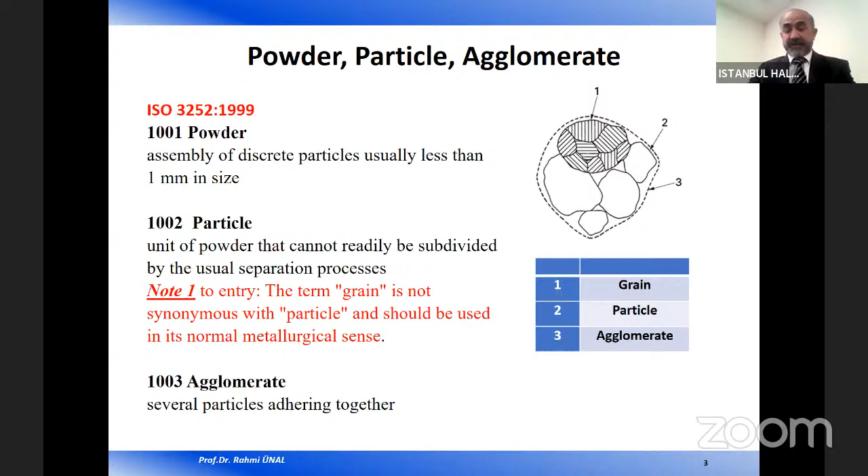Metal powders for additive manufacturing are the raw material. As you know, we use powders to make parts using different additive manufacturing processes. For that reason, metal powders are a very important element of the metal additive manufacturing process.

The critical factors influencing powder attributes must be managed carefully through its entire life cycle to produce quality parts at a competitive cost. The life cycle of metal powder includes powder production, shipment, and various additive part manufacturing steps.

In this presentation, I will focus on powder production methods. Powder quality and consistency need to be maintained at each step of the process, including powder storage and handling. The important elements of metal powder include development of physio-chemical properties, wide supply base, and competitive cost.

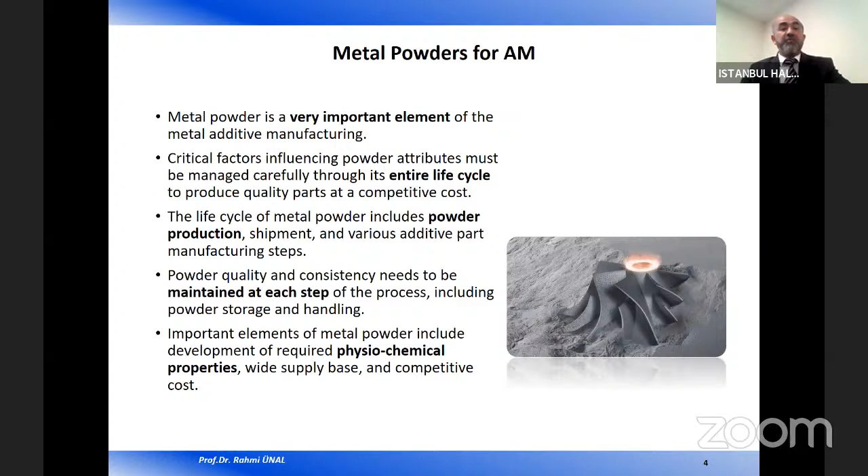Now, let's look at the critical factors of additive manufacturing metal powders: spherical powders with a low level of satellites. If a small particle is attached to a big particle, it is called a satellite.

This reduces the flowability of the powder. Due to this effect, spherical powders have to be without any satellites, or at a low level of satellites.

A high purity and reproducibility level is also important. Oxygen level is another critical factor. And there can be porosity in the powders - this is also a factor.

Good flowability is very important, especially for laser powder bed or electron beam melting processes. High apparent and tap density - these are density definitions.

There are many standards about powder properties. Some of them are listed here. For example, apparent density measurement has an ISO standard, 3923-1. And tap density measurement - I don't want to give the detail of the measurement techniques, but there are many standards describing the measurement techniques, and they are used very much in this industry.

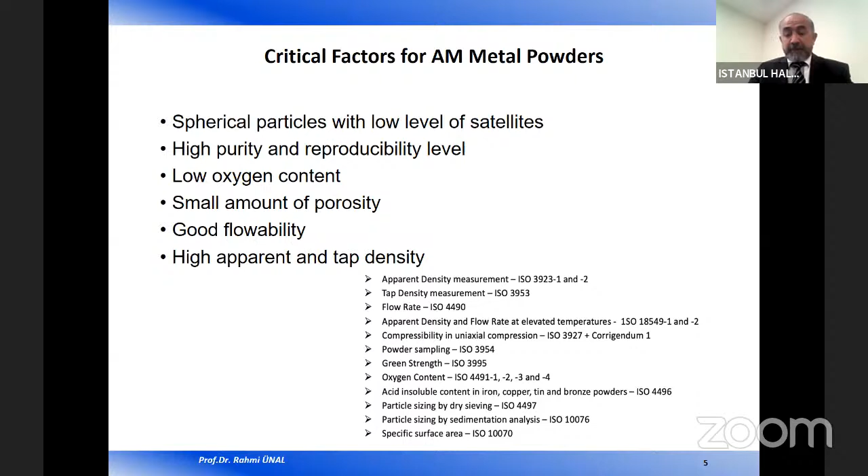If we look at the powder production methods, we can classify them as atomization processes, melt spinning, rotating electrode process, mechanical process, chemical processes, and also electrolytic processes, which is not listed here. Powder production method controls the particle size, particle shape, and other attributes including purity, microstructure, and cost.

For the production of metallic materials, atomization of molten metals and alloys is one of the common mechanisms for production of spherical powder.

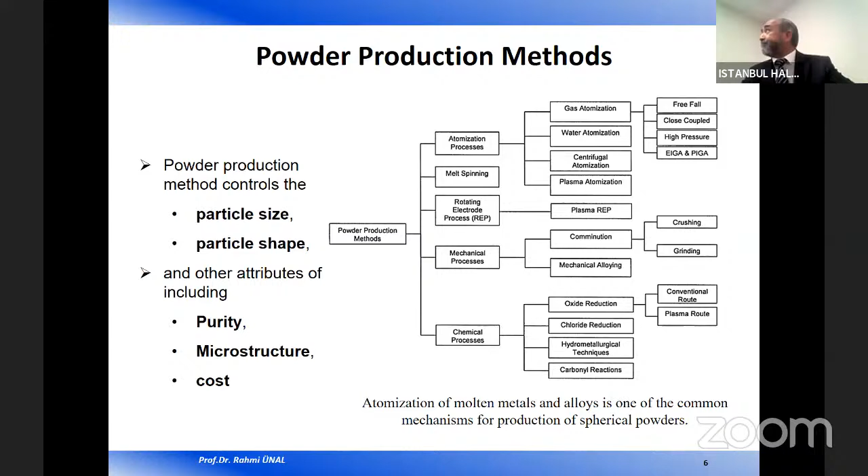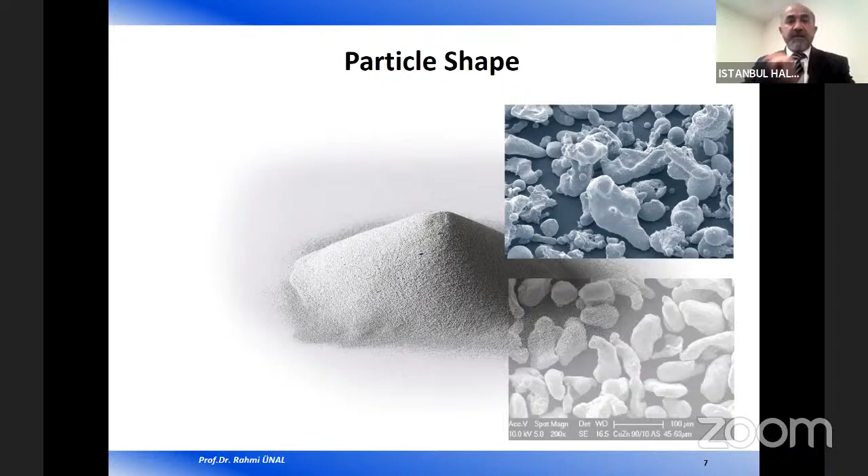Let's look at the particle shapes. If you look at a bulk powder, you can see such a figure. If you look at a closer scale, the particles are irregular in shape. It can be rounded shape, it can be acicular shape, produced by mechanical process. It can be flake type,

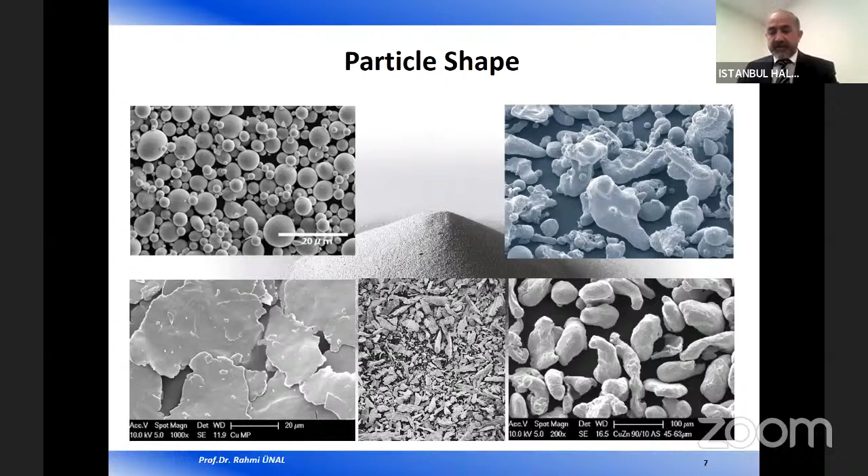and it can be spherical. Spherical powders are used for additive manufacturing processes due to the high flowability and high densities. The production method defines the final particle shape, but there can be some operations where irregular particles can be shaped into spherical by additional processes.

We melt the material in a crucible and pour the melt through a hole, and the nozzle applies high pressure that disintegrates the molten material into small particles. It is solidified in a closed chamber, so the powder is obtained in the closed chamber, and we can control the atmosphere. For that reason, we can produce clean powders.

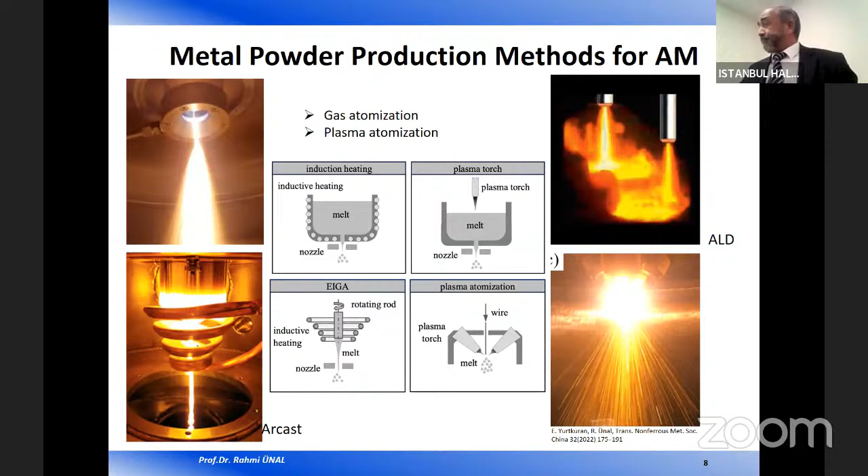This right bottom figure is from our study. I have conducted a project from TUBITAK. It was about plasma atomization. We have designed and constructed a plasma torch, and we have tried titanium alloy powder production.

As I said, there are mainly two basic processes: the first one is gas atomization, and the second one is plasma atomization. Let's look a little bit in detail at the gas atomization process. It can be divided into two groups: free-fall nozzle and close-coupled nozzle. The most used systems are close-coupled nozzles because we can produce fine powders by using them.

Free-fall nozzle can also be used, but the final particle sizes are bigger than with close-coupled nozzles.

We can use air, nitrogen, argon, and helium gases for the gas atomization process, depending on the material. All gases can be used, but if you want to produce clean powder, we have to use argon or helium, because air can cause oxidation of the materials, and nitrogen is not an inert gas. Argon and helium are inert gases, so for clean powder, we have to use argon or helium.

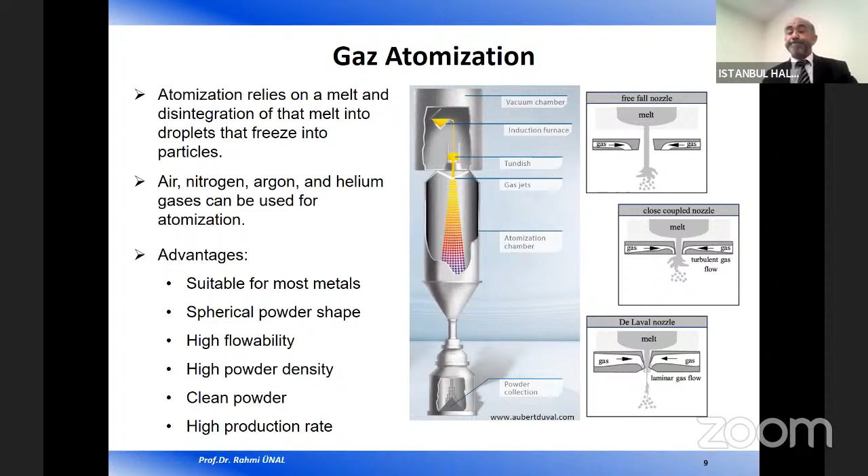Maybe the most important issue for cost is the high production rate. Due to high production rate, the final cost is less than other methods.

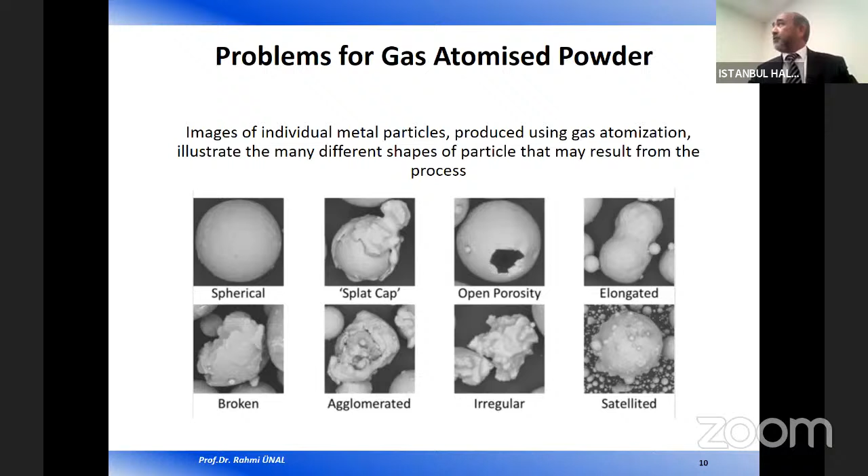There can also be some problems during the gas atomization process. We can produce spherical powders, but we produce the powder in a closed chamber, and in the closed chamber there are powder clouds. Due to the powder clouds, there can be splat cap, open porosity, elongated shapes, broken, agglomerated, irregular, or satellite formations, as shown on the right bottom. If you control the process parameters correctly, you can reduce these problems.

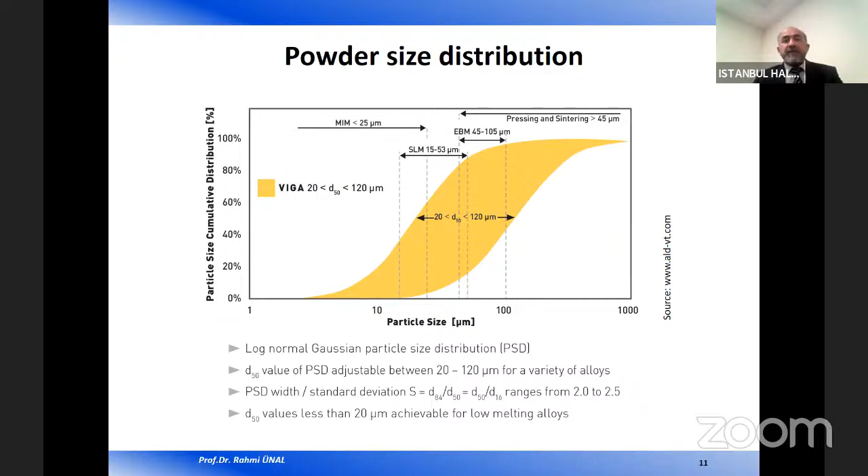We have a size distribution, and we use some portion of it for laser bed production processes. It is generally less than 53 micrometers, with a range of 15 to 53 micrometers. If you look at the distribution data for the laser bed production process, the powder size should fall between these values.

If the median powder size is 20 microns, the yield can be about 50%. If the median powder size is 60 micrometers, the yield can be 40%. The remaining powders can be used in other processes, as listed in the figure above.

For example, powders up to 106 micrometers can be used for the EBM process. Coarser powders can be used for other powder metallurgy processes like press and sinter technology and other techniques. Smaller powder, less than 15 micrometers, can also be used for metal injection molding. So if you produce a powder, it has a size distribution, and after classification, you can use each part for different applications.

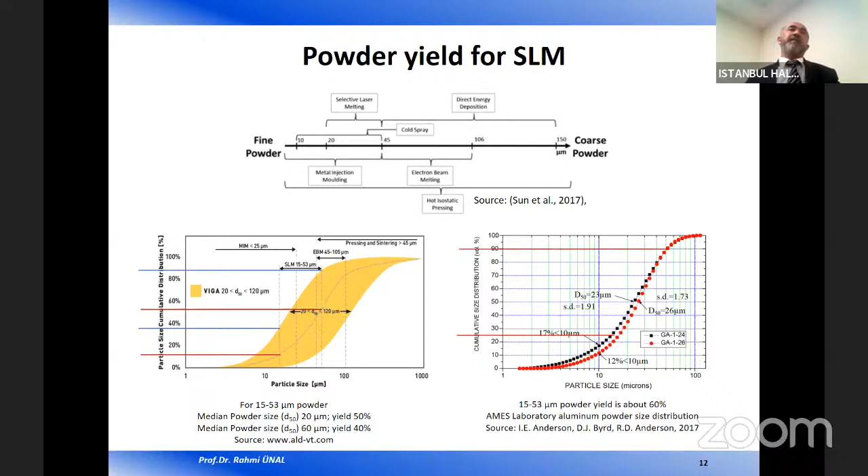The left figure is from ALD, and the right figure is from AMES Laboratory in the USA, showing aluminum powder size distribution. It has a similar size distribution for 15 to 53 micrometer powder, with a yield of about 60%. So we can say the yield for this powder size range can be from 40 to 60%, which increases the costs.

Now let's look at the titanium alloy powder production processes. We have already talked about EIGA, electrode induction melting gas atomization, and plasma wire atomization process, sometimes called plasma wire or plasma atomization. Plasma rotating electrode process is another process, and cold wall induction crucible atomization is another process.

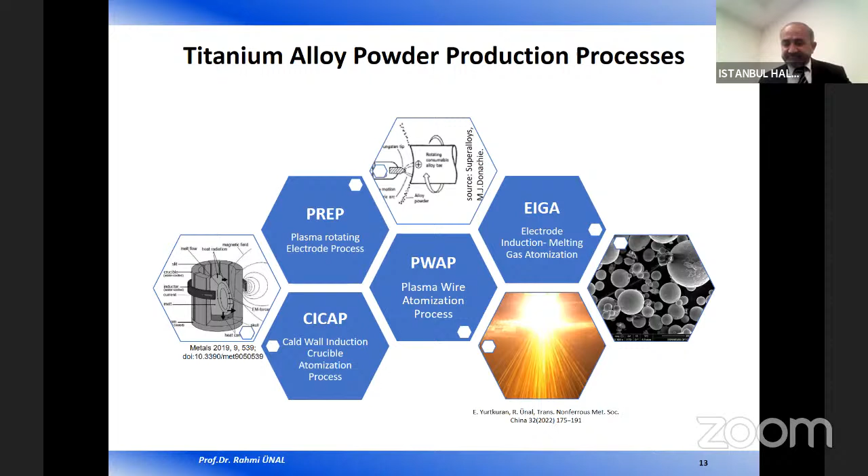There is a crucible in the cold wall induction process, but there is no contact between the melt and the crucible. However, the energy used is very high, and for that reason, it is not competitive with other methods.

Let's look at the oxygen level for some size ranges. If the powder is less than 15 micrometers in size, it has 3500 ppm oxygen. Less than 45 micrometers, it is 800 ppm, and if powder size is greater than this value, it can have 600 ppm oxygen level. We can easily say that small particles are more sensitive to oxidation.

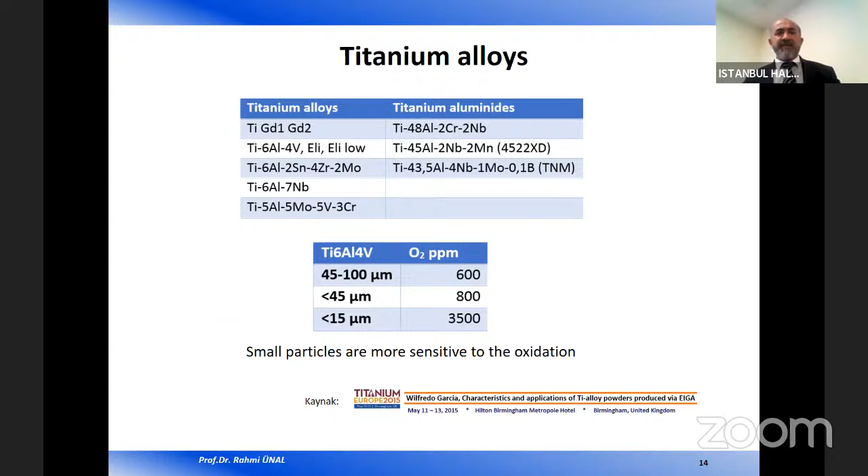Looking at the EIGA process for titanium alloy powder production, it was the first method used. Plasma atomization is now mostly used for titanium alloy powder production. In this process, the production rate is very low, and it depends on the electrode diameter.

Up to 90 or 100 millimeters electrode diameter, the production rate is about 1 kilogram per minute. If you increase the electrode diameter to 140 millimeters, the melt rate can increase to 1.5 kilogram per minute. The production rate is not so high, it is very small, and for that reason the cost is high.

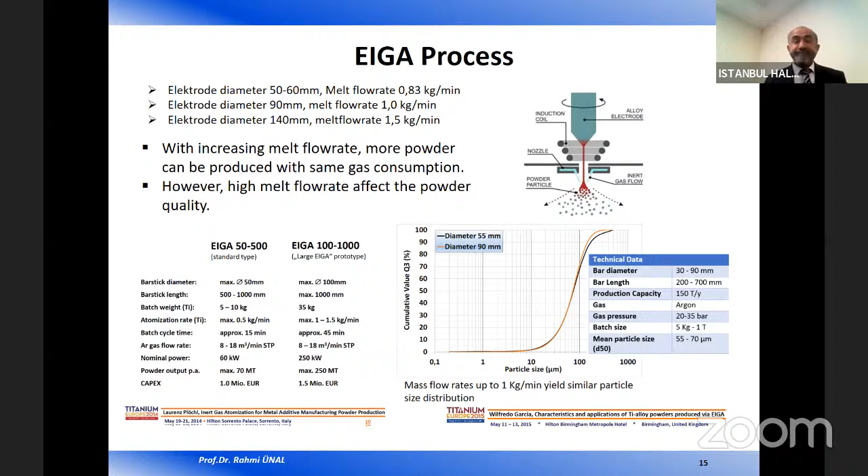In recent years, plasma atomization has attracted much interest, and many alloys are produced using this method. The most used alloy is titanium alloys, but aluminum and other metals are also produced using this method.

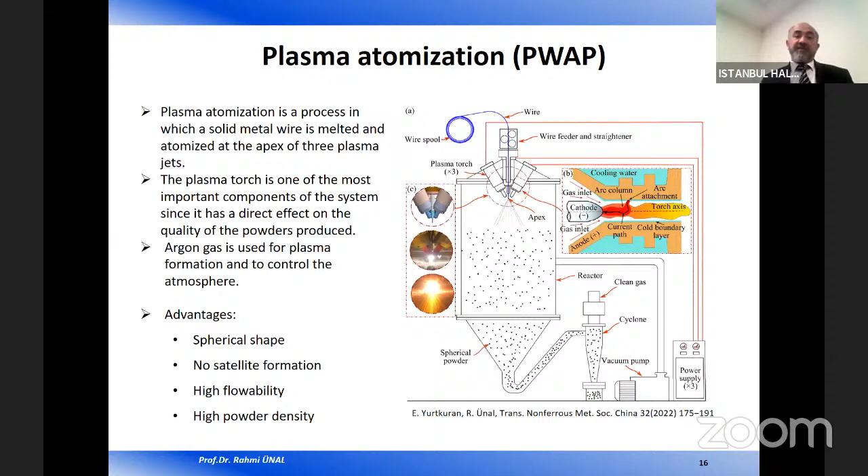Let's look at the advantages: spherical shape, no satellite formation, because the production rate is very low. For that reason, there is no high powder cloud in the chamber, so satellite formation is less, or there's no satellite formation. This gives high flowability due to the perfect spherical shape, and high powder density as a result.

There is a technique called plasma spheroidization process. It uses RF plasma, radio frequency plasma. By using this approach, you can convert irregular particles to a spherical shape.

Now I have a project about this method. We are starting simulation analysis now. We will design and construct a plasma spheroidization system, and adapt it to the gas atomization system in our laboratory, to study the effect of plasma on the spheroidization process. This process can be used especially for used powders to make them spherical, and also if you have a particle from any production method that has no spherical shape, you can convert its shape into a spherical shape.

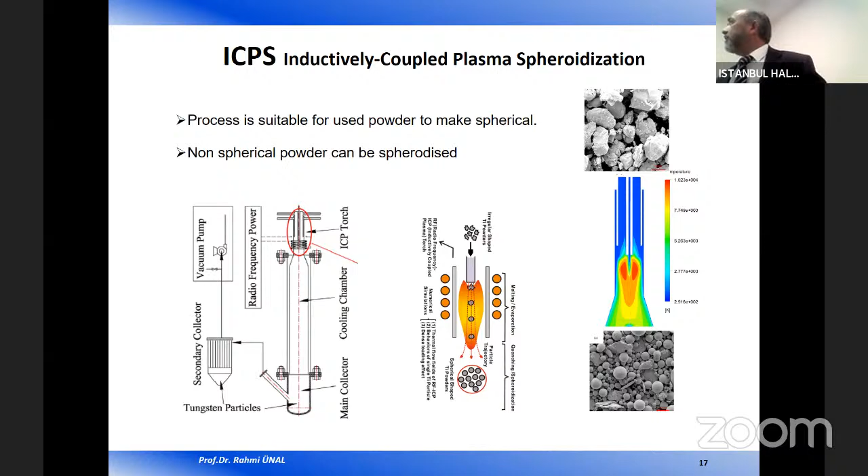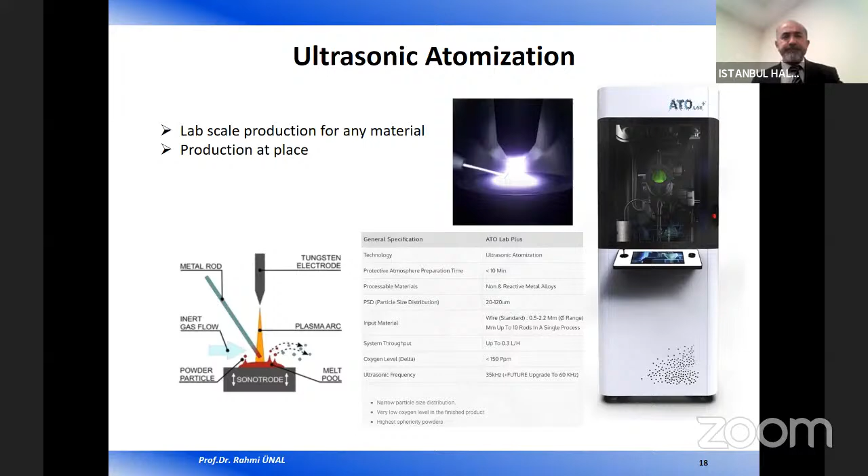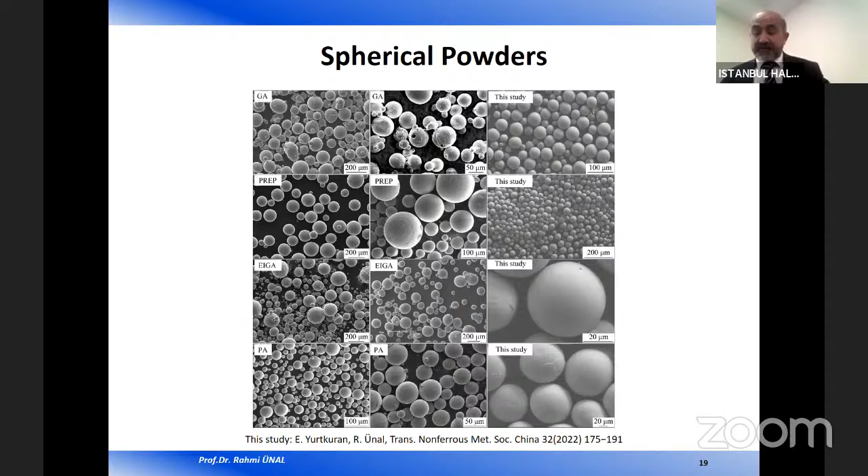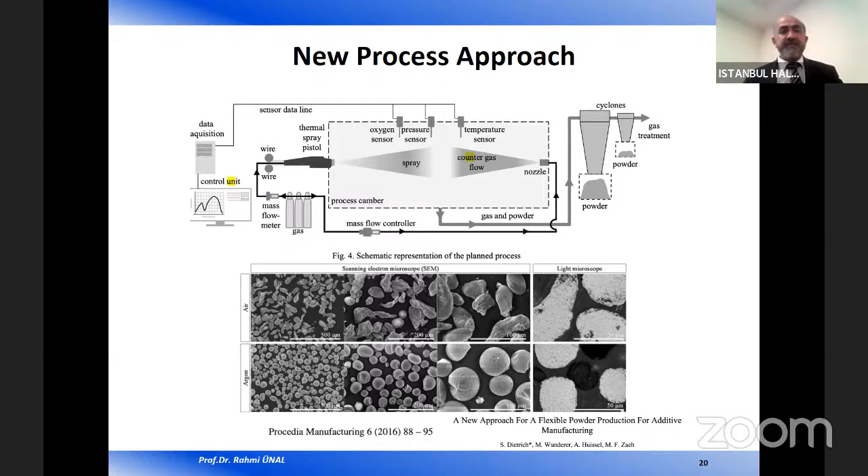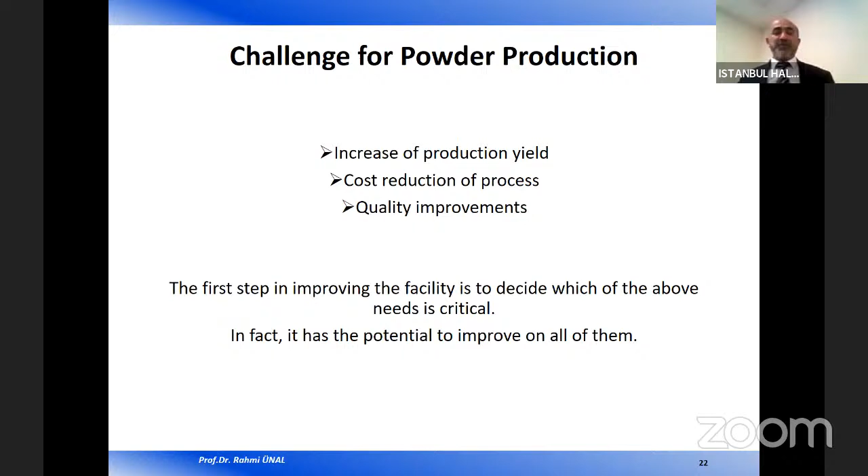What about the challenges for powder production? Increase of production yield, cost reduction, and quality improvement - these are the three challenges for powder production. The first step in improving the facility is to decide which of these needs is critical. In fact, there is potential to improve all of them. There are many studies to increase yield, reduce cost, and improve quality, because we need high quality powders, especially for additive manufacturing processes. There are always challenges to increase yield, reduce cost, and improve quality of the powders. Thanks for your attention. Thank you very much.

What about you? Are there any questions? Is there any question? No. Okay, thank you.

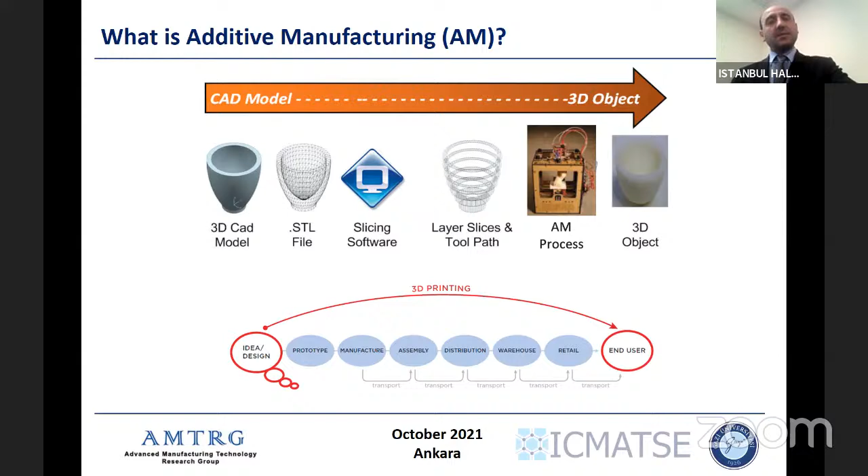The steps in additive manufacturing start with CAD data, which we convert to STL data, then slice it to get the data for each layer. Then we generate tool paths or scan paths for the given layer, convert them to machine codes, and use a machine to produce the 3D objects. This is totally digitized manufacturing, so we bypass prototyping, manufacturing, assembling, tooling, fixturing, etc. This helps reduce lead times and production times in some cases, but actually the production time of 3D printing is not always very short - sometimes it is very long.

Well, just a very general classification, we classify the additive manufacturing processes based on the material type or material form: liquid base, solid base, and powder base. In liquid base, we do melting or polymerization. In solid base, we do laminated object manufacturing.

In the powder base, again we do melting or binding. Under melting, we mainly use metal additive manufacturing processes like selective laser sintering, melting, direct laser metal sintering, electron beam melting, and laminated engineered net shaping.

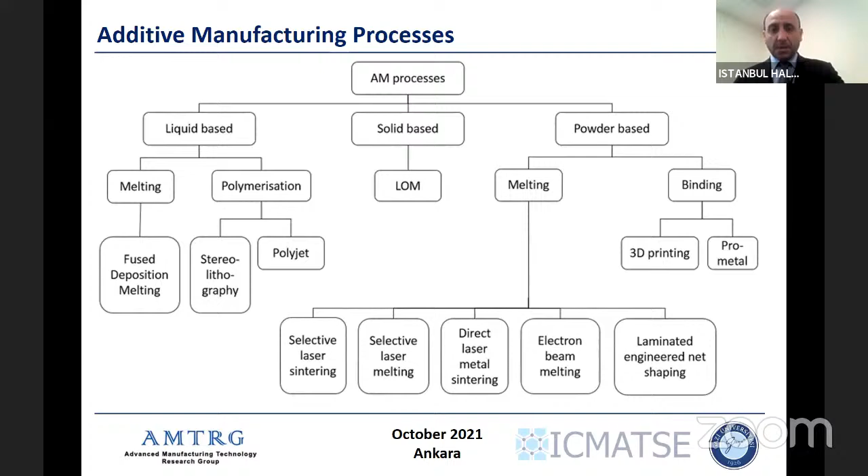But when we focus on metal additive manufacturing, basically we have two heat sources: beam and arc. We use beam coming from laser, and the other one coming from electron beam. And for arc, we use TIG, MIG, MAG, or plasma arc, as well as dual plasma.

Afterwards, we classify metal additive manufacturing processes based on feedstock, like whether we use wire or powder. So when we use wire with laser beam, it's going to be wire plus laser AM. If you use powder, the process could be done on the powder bed, or we blow powder or send the powder from the nozzle, and it's going to be powder bed fusion process or blown powder, DED process.

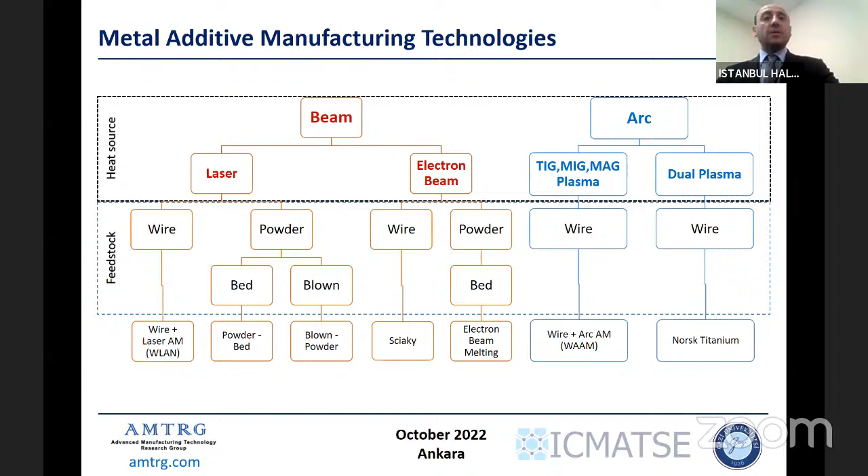When we use the arc heat source, we have wire for WAAM systems, wire arc additive manufacturing. Also, we may use a dual plasma system as well to melt the material, deposit it, and create the 3D objects. Of course, all additive manufacturing processes are not all the same.

They have some advantages among each other. Basically, for example, when we take a look at complexity, the powder bed systems give us more complex structures. But when we take a look at the WAAM process, we may get less accurate or complex parts or products.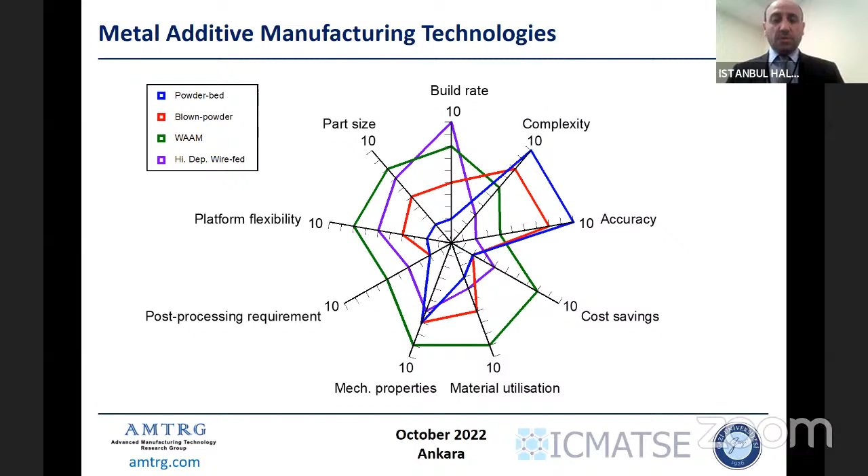And of course, in additive manufacturing, the buy-to-fly ratio is a very critical calculation of how much material we use. We calculate the buy-to-fly ratio by dividing the weight of the raw material by the weight of the final component. For example, if the weight of the material is 10 kilos at the beginning, and the final product is 2 kilos, your buy-to-fly ratio is 5.

So our aim is not to increase the buy-to-fly ratio, but to decrease it. If the final weight and the initial weight are going to be equal, that's an ideal condition, meaning you don't have any waste - the perfect or ideal condition. But in fact, there's always some kind of chips or waste, so it's mostly bigger than 1, but if you're close to 1, that's the best condition for the additive manufacturing process.

So if you take a look at the metal additive manufacturing processes, you can see from these charts that some processes have high deposition rates, some have low deposition rates, and layer heights may change. Surface topography may change, and relative cost also may change. But also, we can get more accurate surfaces or more accurate results, so we may have some other bad sides for the process as well.

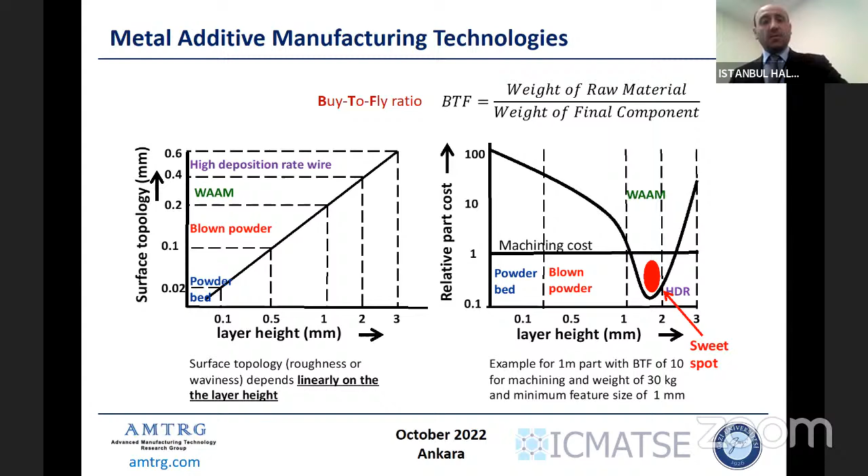Those additive manufacturing processes are not all mature; they have some maturity level, basically. But among them, laser powder bed fusion process is now the most mature process - commercially sold, and you can actually buy the machines, and software is developed, so you can use it easily. The other processes are coming to this level, but not quite at the level powder bed process has reached.

But researchers and companies are still working on it. Probably EBM, powder laser deposition, and WAAM as well are going to reach this high maturity level, like powder bed fusion process.

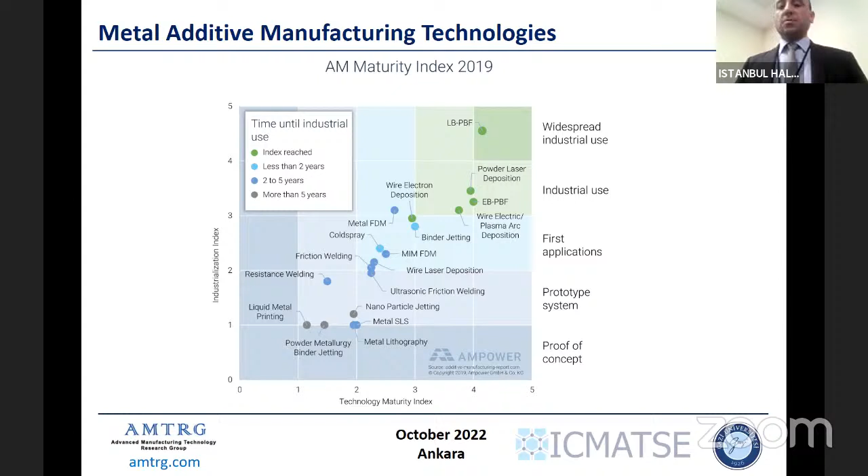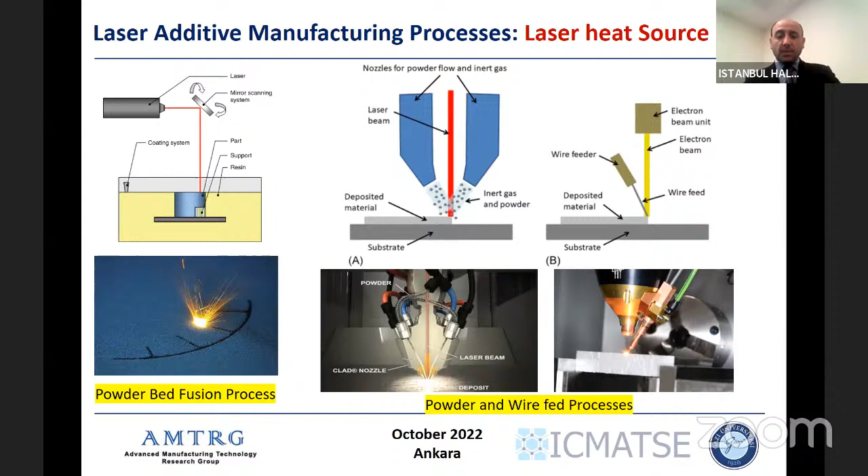The laser is the main heat source in metal additive manufacturing. We use laser for powder bed systems, DED systems, and wire melting systems as well, for melting and depositing the material. So laser is very prominent equipment for us. But when we talk about laser, the optic systems are very critical, so we use optics and galvanometers or other optic systems. These are other costly, high cost equipments that we use in metal additive manufacturing systems.

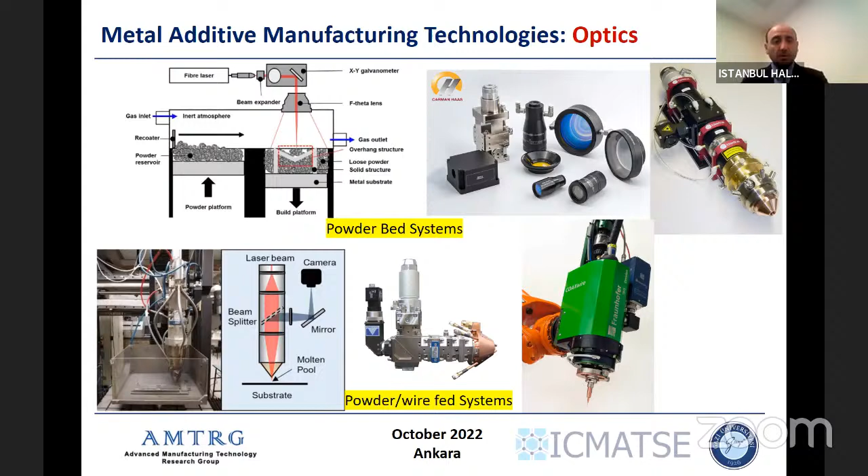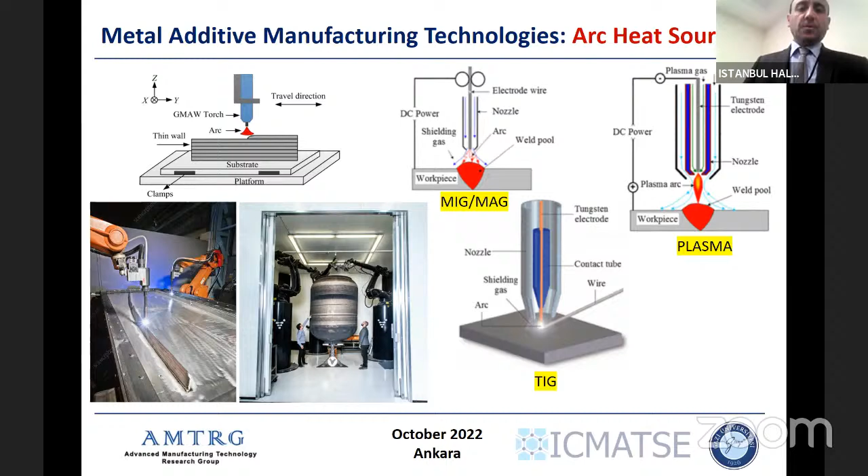When we take a look at arc, we can use MIG-MAG arc, plasma arc, or TIG arc. The equipment for those arcs is not as costly or expensive as laser, but we may have less costly products, and we use them again for melting and deposition as well.

So what is the raw material? We use two types of raw materials: metal powder and metal wire. Professor has already mentioned the powder production, so I'll remove that. I know he's going to mention powder production, but we have metal wire as well. I'm not going to explain how we produce them, but between them the cost may differ, production time, surface quality may differ, density, availability, materials diversity, and efficiency may differ depending on whether you use powder or wire.

In fact, wire efficiency is almost better, or deposition efficiency as well, and cost as well. The cost is going to be less, but the deposition rate is going to be high, because even in powder bed fusion processes we lose some of the powder. But with wire, we use 100% of the wire to deposit the material and get the produced product.

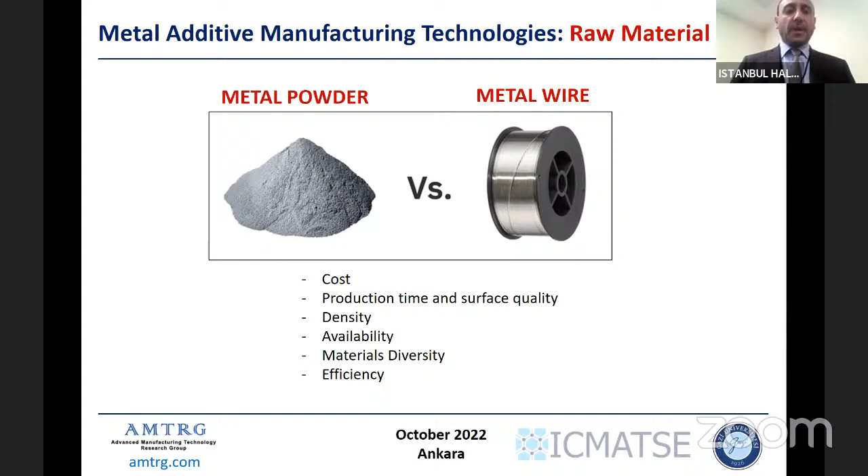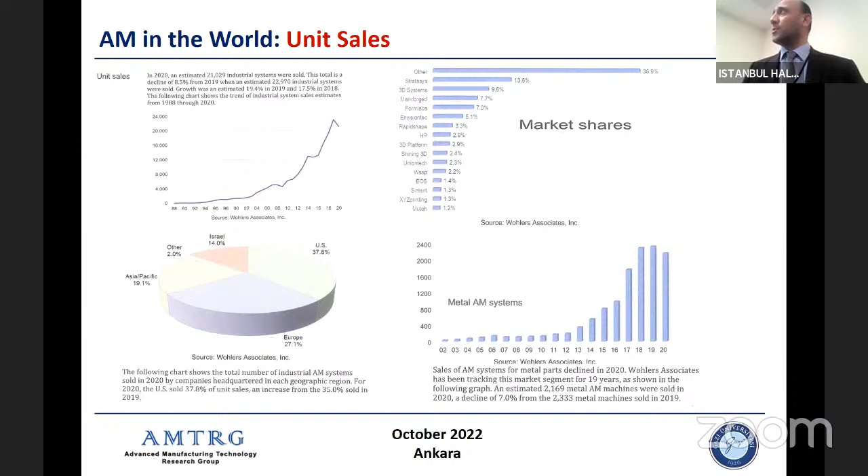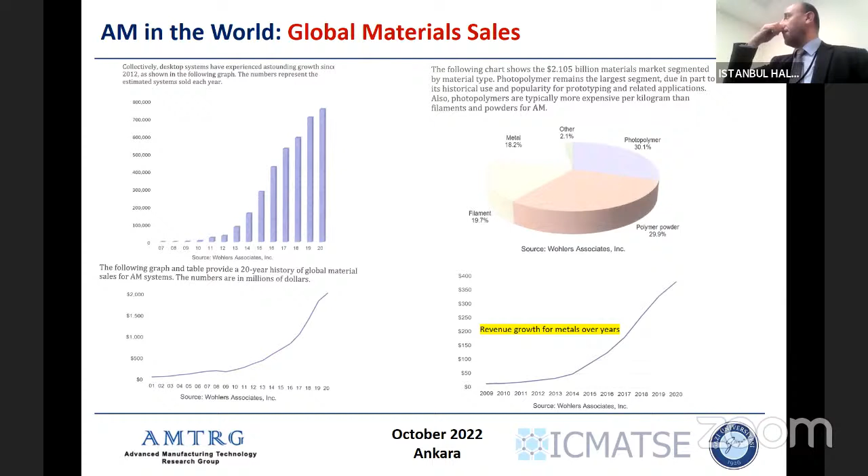Mainly the United States and Europe are using those systems, and Asia Pacific countries are also using them very much. And how about the materials? Metal is going to be 18.2% in total, not as much as polymer and polymeric-based materials or powder in filaments, because FDM systems or resins or photopolymeric materials are sold much more than metal, but metal is getting higher, and there is also revenue growth of metals over the years getting up in sales.

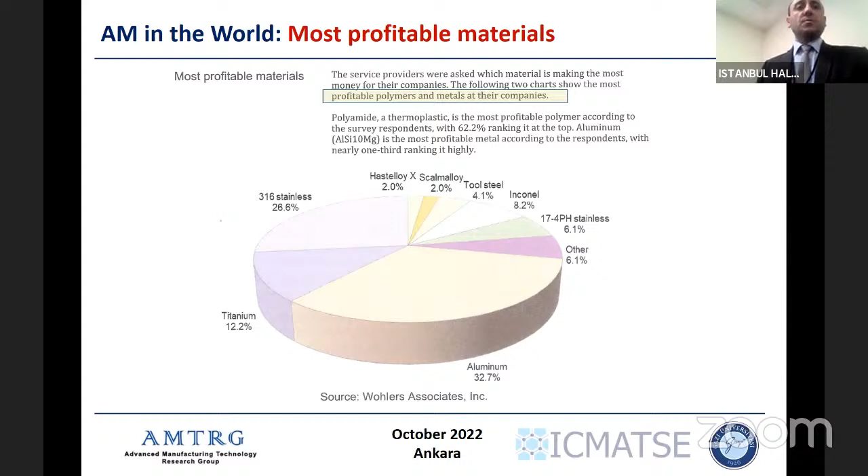Which metals do we use in metal manufacturing? Mainly aluminum, used 32.7%, titanium, stainless steel, tool steels, Hastelloys, and some Inconels are mainly used in metal manufacturing. Mainly aerospace, defense companies, automotive companies, and some service companies are using these kinds of systems. Medical companies are using them as well.

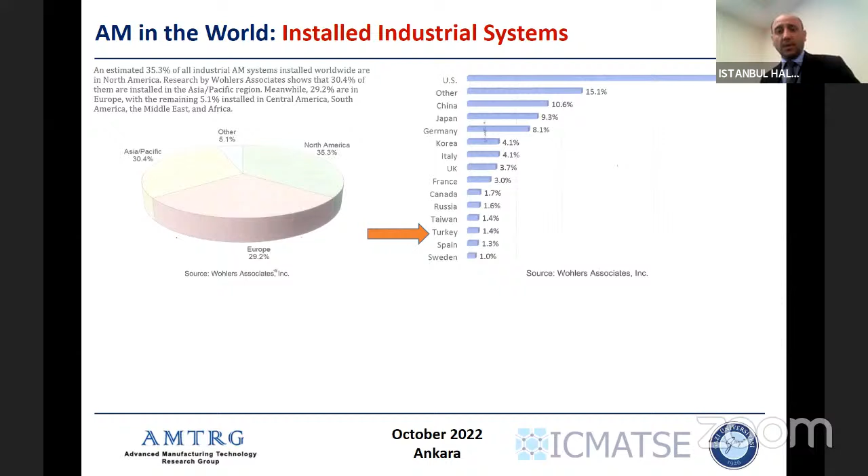If we take a look at the installed industrial systems, most systems are being sold in the United States, China, Japan, and Germany as well. Turkey is about 1.4%, not very well, but not bad, somewhere between them.

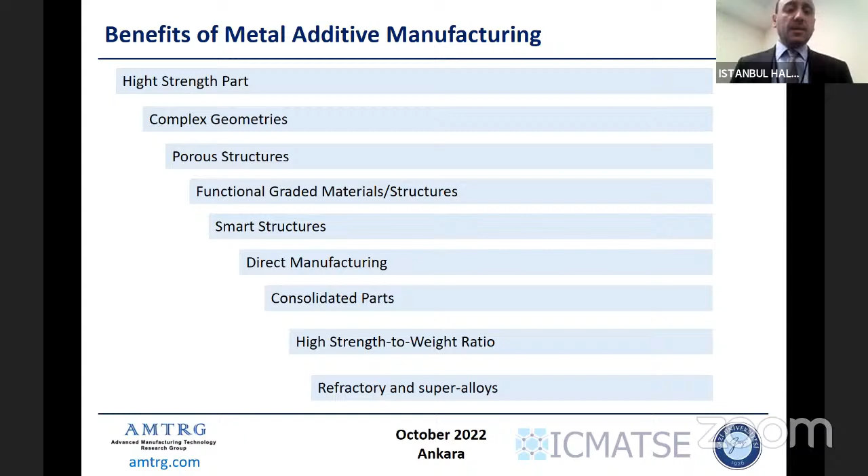So what are the benefits of metal additive manufacturing? First of all, we get high strength parts, complex geometry parts. We may get porous structures, functionally graded materials or structures, smart structures. We can have direct manufacturing to end products, consolidated parts, high strength to weight ratio products, and we may also use it to produce high refractory and superalloys in metal manufacturing.

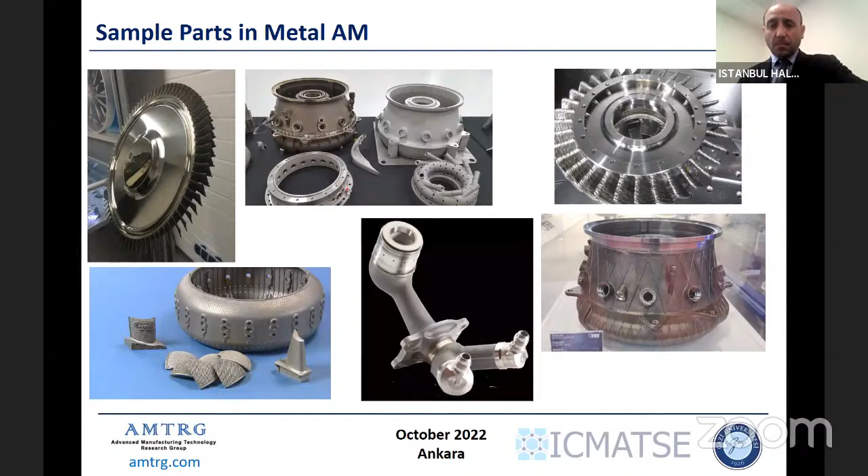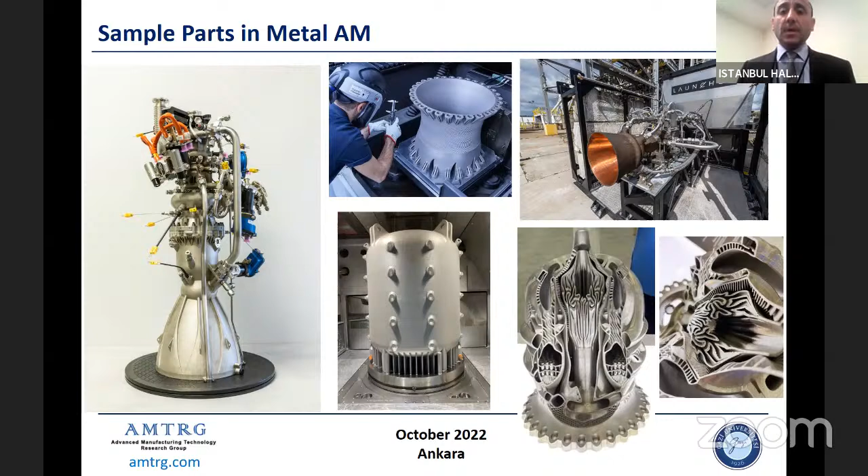Those are mainly used in the rocket industry, and as you can see, they are also being developed and produced. On the right corner, this is the highest complexity geometry and design until now, and now it's being produced by EOS systems.

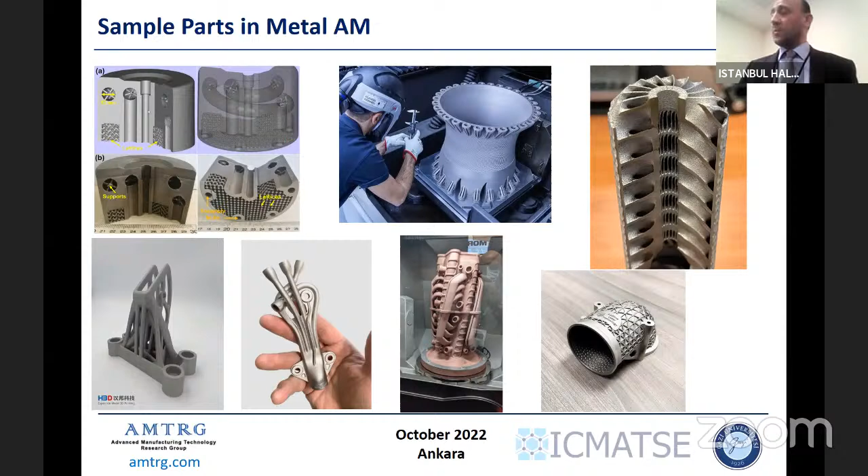We may get very complicated and intricate parts using metal additive manufacturing, some of which are seen on this screen. We may also produce large parts by using WAAM systems or laser wire systems, used in aerospace applications like SpaceX or NASA.

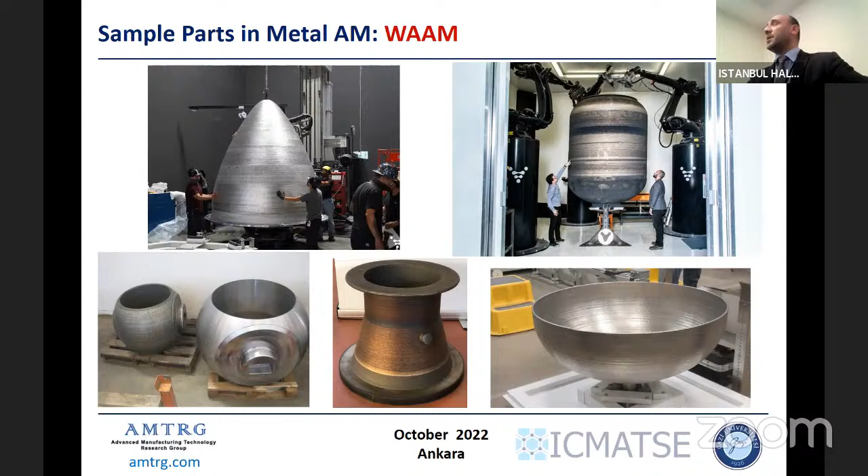As far as I know, Roketsan is trying to build such big systems and production as well. Additive manufacturing can also be used for satellite parts, like brackets connected to the platform. These are very complicated parts, and we can reduce the weight of these brackets from the original design by almost 40%.

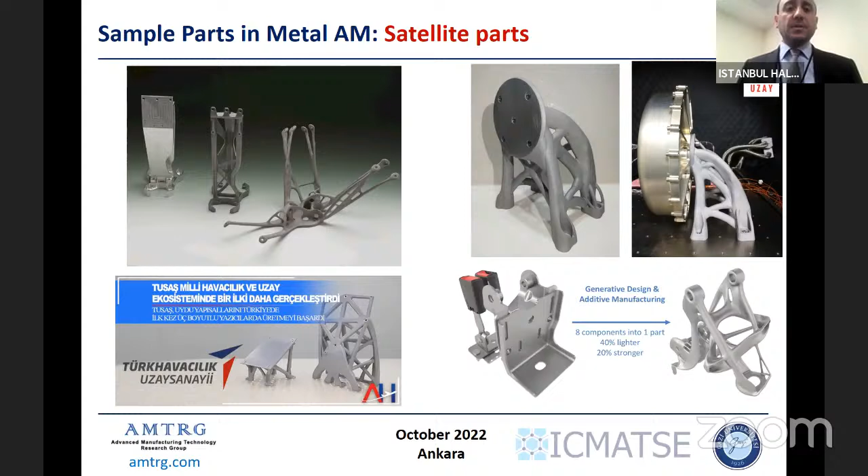So let's take a look at some research topics that researchers and academics are still working on. First, people are working on multi-laser systems to reduce production time, and processing is very critical because the surface is not good, and mechanical properties are not good either. So laser polishing, laser shock peening, and similar processes are being done.

Magnetic shape memory alloys are under research now. For the laser powder bed fusion process, blended powders are being used, and functionally graded materials and structures are being worked on by researchers.

Cold spraying is another additive manufacturing process that's getting popular, and people are trying to produce parts using refractory alloys. Large volume production is one of the aims of metal systems for companies, who would like to produce high volume parts as well.

In-situ control and monitoring, there's another research topic: machine learning, new design approaches like biomimicry, melt pool characteristics, topology optimization, and phase transformation are still under research by academics.

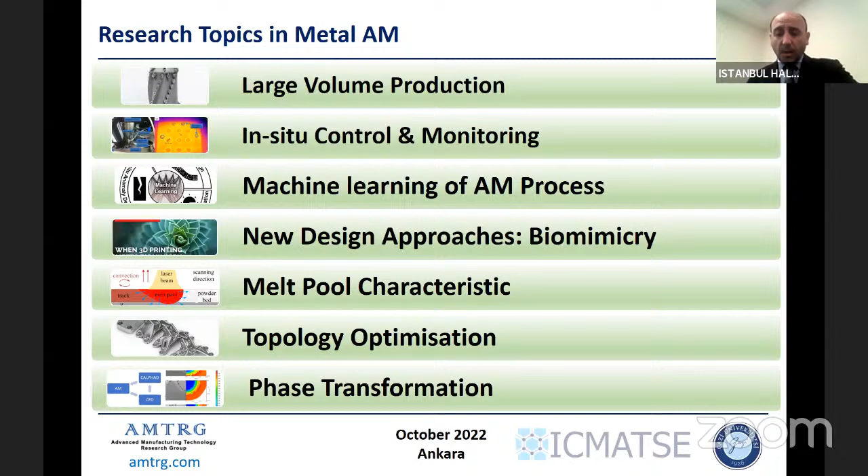Very quickly, what we are doing as a research group: we work on metal additive mainly, also design for additive manufacturing, topology optimization, and we also work on laser polishing and ECM polishing as well.

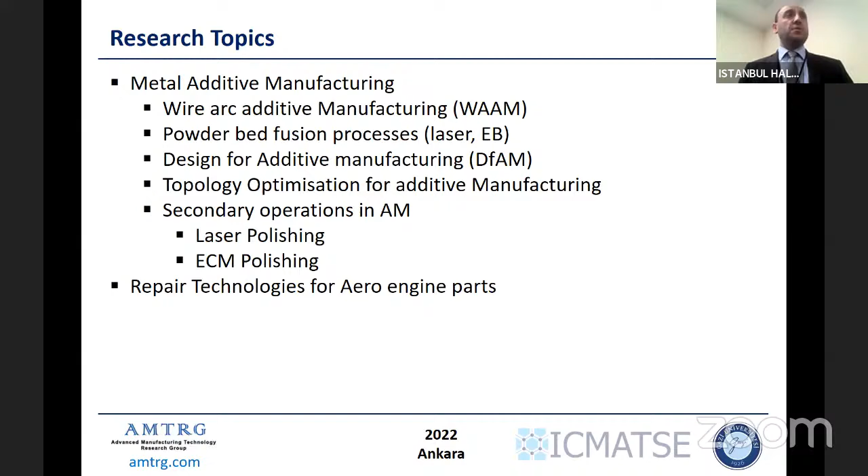We know that during the laser powder interaction, the melt pool is very critical. So in one of our research works, we try to predict how much the melt pool is going to be produced when the laser hits the powder surface. We develop equations and an analytical approach to simulate this by writing a computer program.

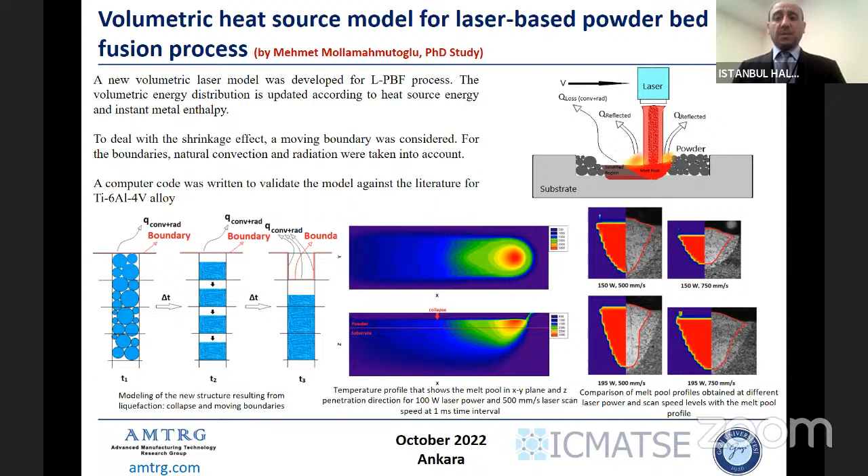The aim is to obtain the best parameters for the defined material. We also work on how the materials behave during the process.

Some materials like titanium 6-4 get into martensite very quickly, but during the process, if we change things a little—for example, heat up the powder bed, or change the parameters—can we decompose the titanium phases like alpha and beta? We try to get parameters and change the processes to decompose those phases.

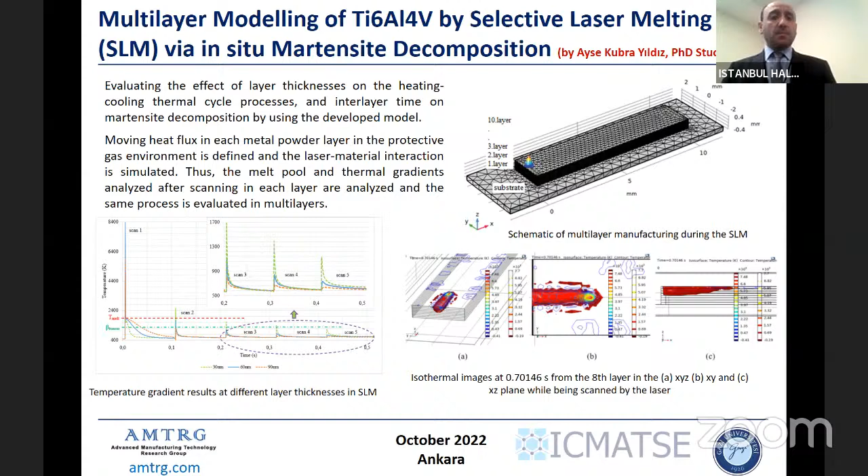We also write programs and try to develop approaches for the laser powder bed fusion process. As I said, the surfaces are not very good—we obtain very rough surfaces in additive manufacturing, so we try to reduce that roughness as much as we can.

One approach is laser polishing. When we apply the laser afterwards, after production, we try to remelt a very thin surface area and then polish it to get a better surface. So we work on this a little.

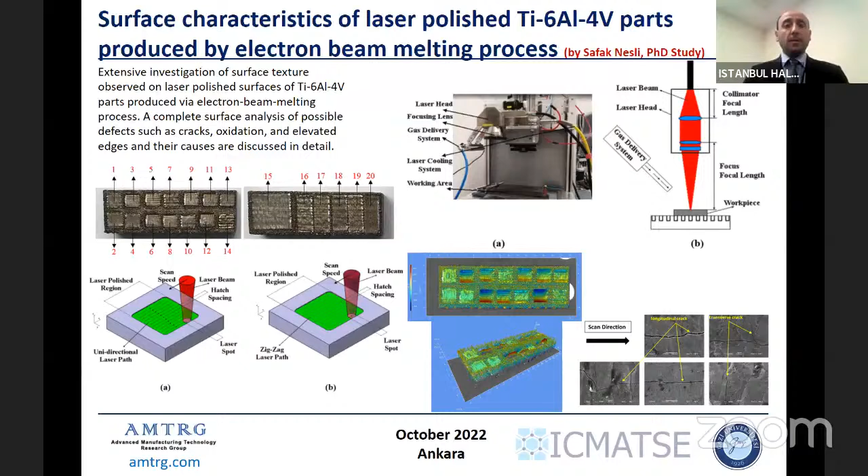In one PhD student's work, who already graduated, we worked on titanium 6-4 produced by the EBM process, and we got very good results. For example, EBM surfaces about 40 Ra, we reduced to almost 2 Ra by using the laser polishing process.

And also, some of my researchers are working on WAAM.

In the WAAM system, we developed ways to calculate the delay time, because for each layer we have to wait almost 1 to 1.5 minutes, especially for steel type materials, because there's going to be huge heat accumulation. That heat accumulation may result in geometrical changes on the produced parts. So we worked on it more and developed numerical approaches to predict how much we need to wait for each layer to get better geometries and dimensions.

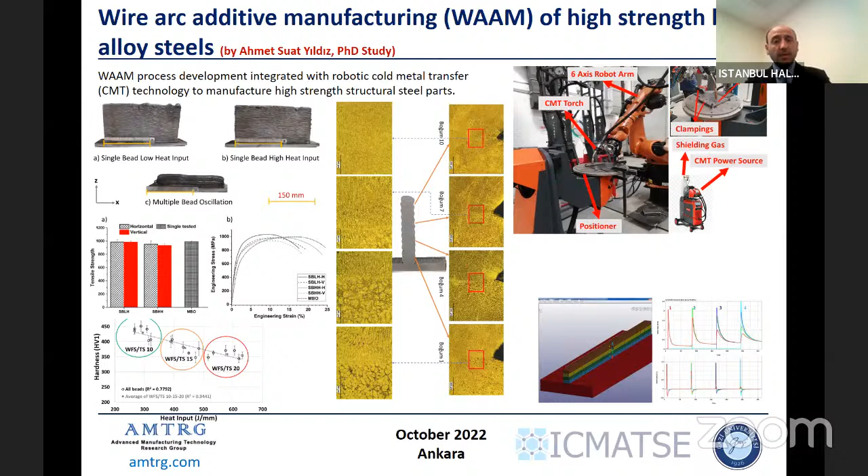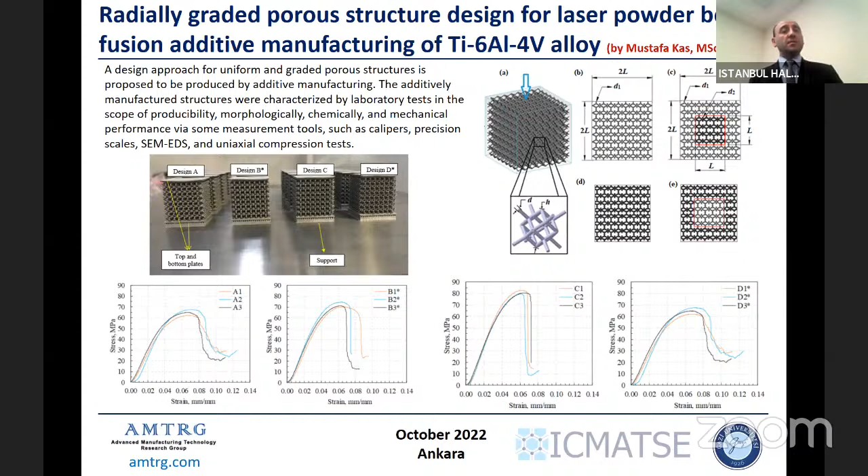We did a lot of work to evaluate and validate. We also worked on laser powder bed systems for designing truss systems. These truss-based designs are based on density ratio from the outside to inside. We changed the density ratio and did compression tests to see how the design changes may result in the compression resistance of such truss type geometries.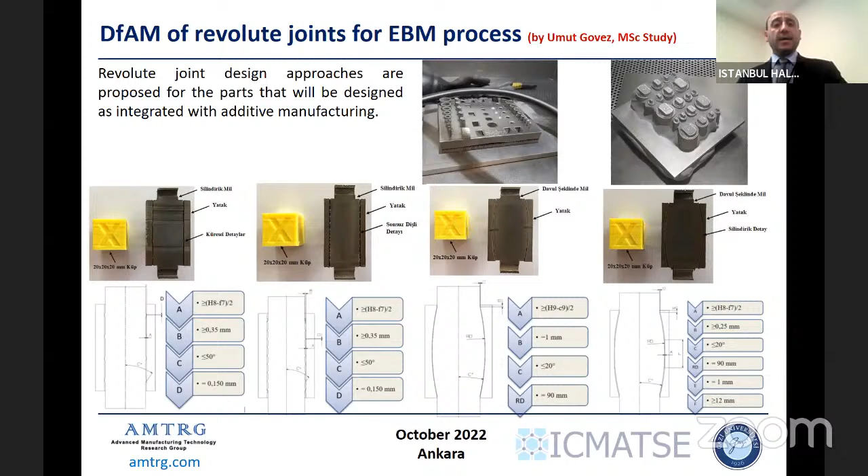For the EBM process, we tried to design some joints. We tried to get revolute joints in the as-built case, and applied these designs in the EBM. Then we tried to determine some rules and tolerances to obtain the revolute joints as a consolidated design.

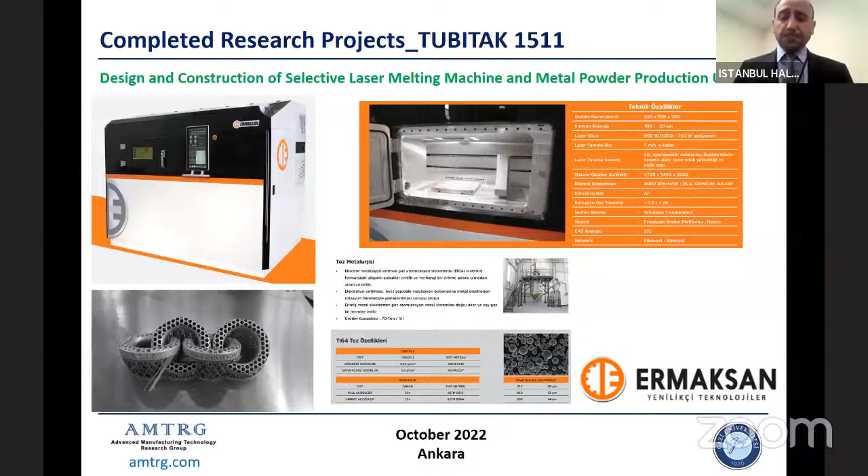I, along with Professor Ünal, were involved in a scientific research project, an industrial TÜBİTAK 1511 project, with Ermaksan. We joined a group and developed and produced the first metal additive manufacturing systems. Here are some pictures. Now it is being sold by Ermaksan, along with a powder production system as well.

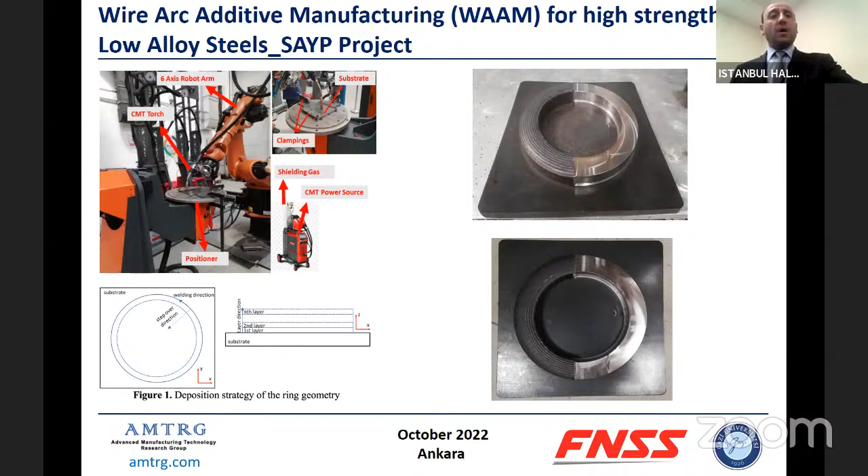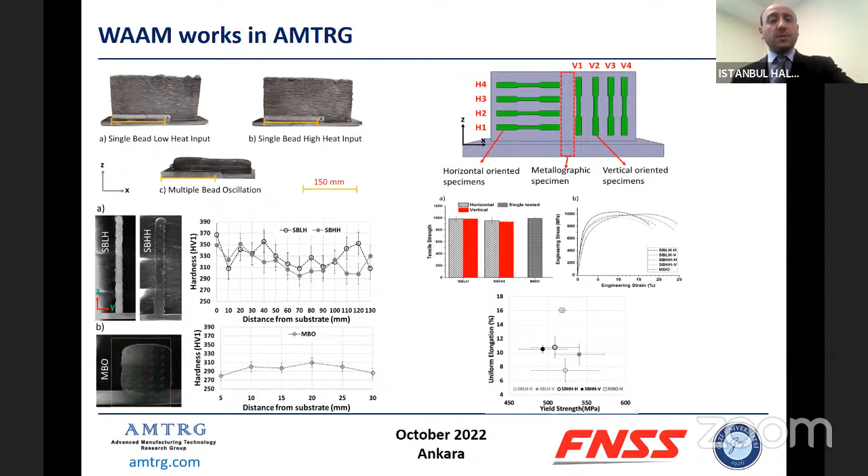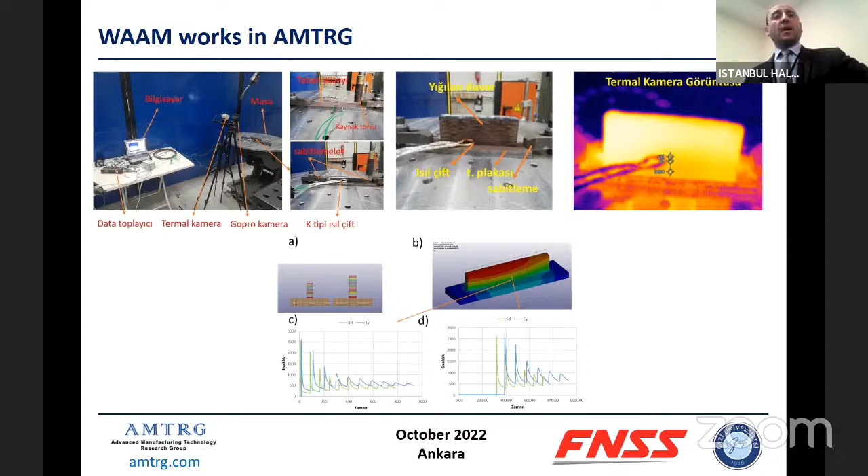I worked with FNSS to produce some of their parts using WAAM, and they tested it and are now using this WAAM system. We did a lot of mechanical measurements for them to get mechanical properties very close to their design requirements. We also measured temperatures during the process, checked for faults, and saw that the isotropy of the produced parts is perfect. The parts are now being used by FNSS company.

I also worked with another company, Intecro Robotics, and we aimed to develop robotic WAAM systems. These robotic WAAM systems feature dual material feeding, a magnetic table, a vibration table, offline control, and also some kind of measurement systems. So this is going to be a kind of WAAM cell.

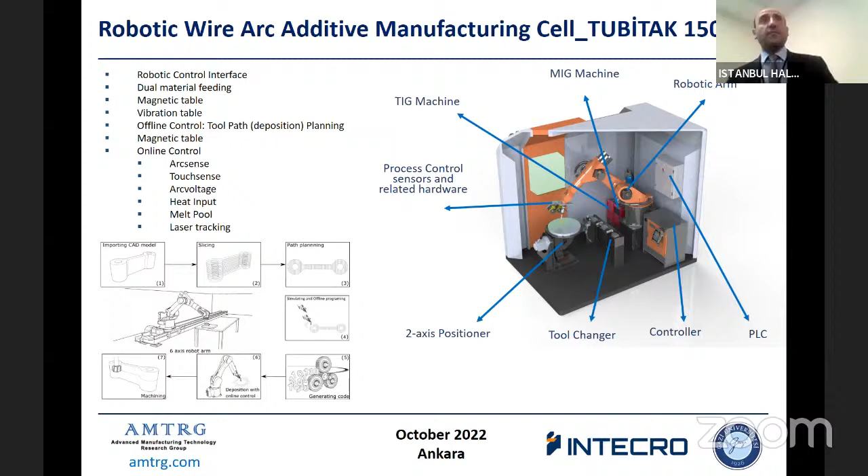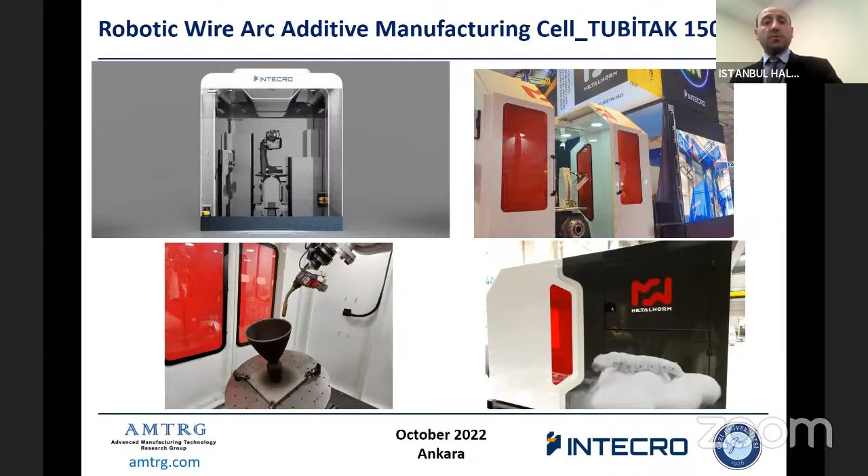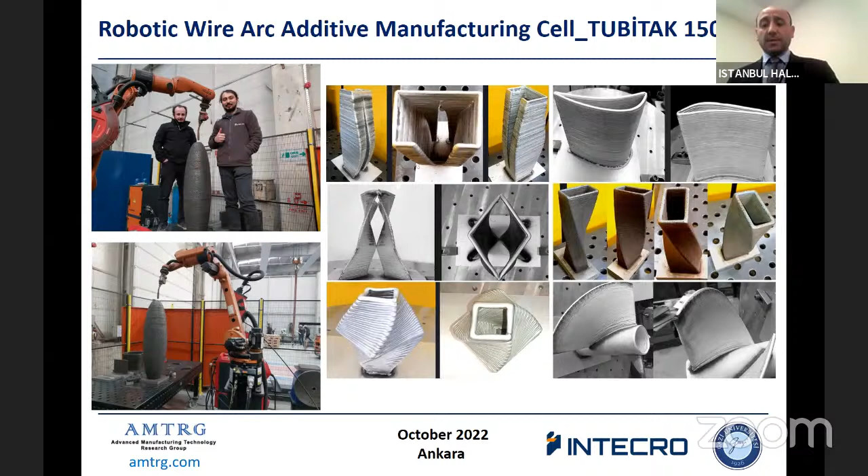Now it is finished and already being presented at some fairs, and these are some of the pictures. The next one is going to be at Formnext in Frankfurt. We can produce very large metal structures using aluminum, stainless steel, steels. We haven't tried titanium and Inconel, but we successfully developed two parts. We successfully measured some melt pools, arcs, and voltages, and we can plot and monitor them, so we can fully control the process using this cell.

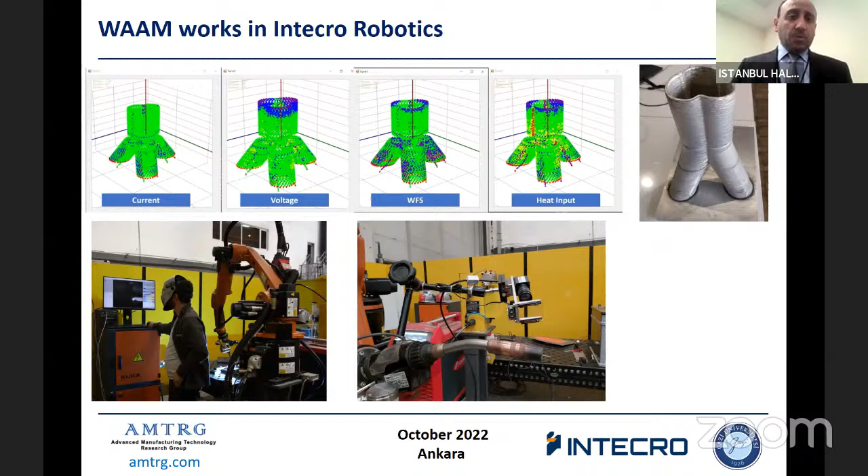We also have a lot of work on WAAM systems. One is trying to keep the heat around the production area, so we have shielding systems and did a lot of experiments. We also developed some tool paths or deposition paths so as not to accumulate heat on a very narrow area. So we changed the tool paths and did experiments and trials, and we see that when we change the position of the paths based on temperature accumulation, we get good results on the geometry. But we're still doing the experiments, we continue them.

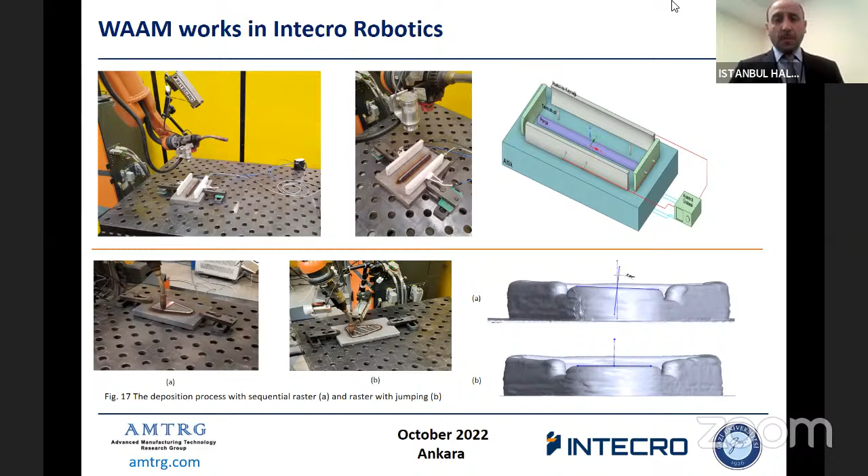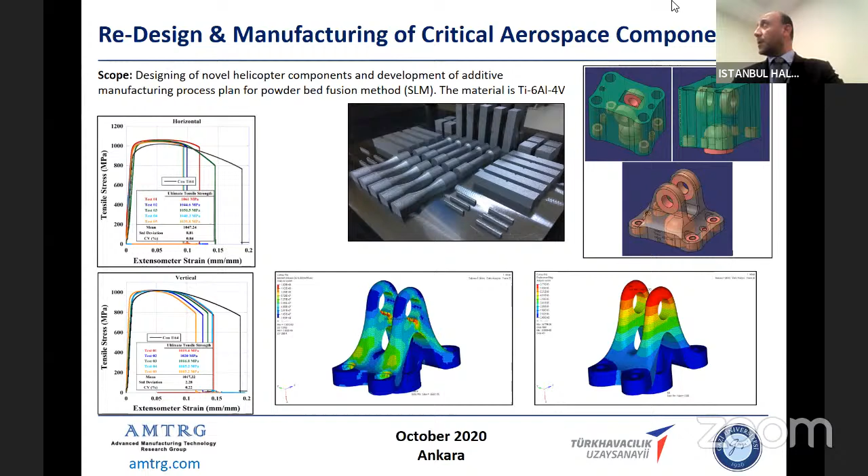I work with TUSAŞ, the Turkish aerospace company, to design and produce flight critical parts. We did topological optimizations, a lot of measurements and experiments, and then successfully produced one of the parts. So I continue.

I also work with TÜBİTAK Uzay to design brackets. We used biomimicry to design them, and then we tested them.